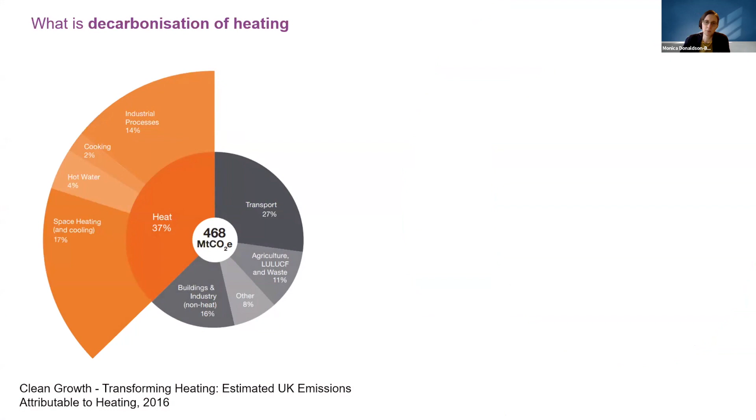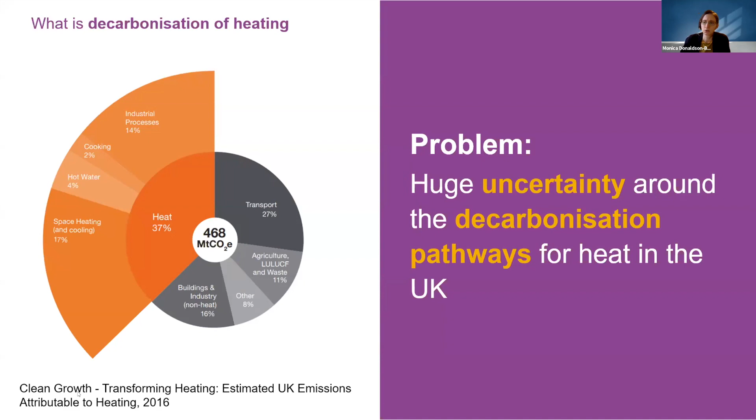But I think there's a second part of this issue as well, which is the fact that there is uncertainty. There isn't just one straightforward way that we can take in order to decarbonize heat, and that, as I said, produces uncertainty in the industry. So in order to move forward the debate, we developed a series of roadmaps for the delivery of infrastructure required for 3 different pathways for heat decarbonization.

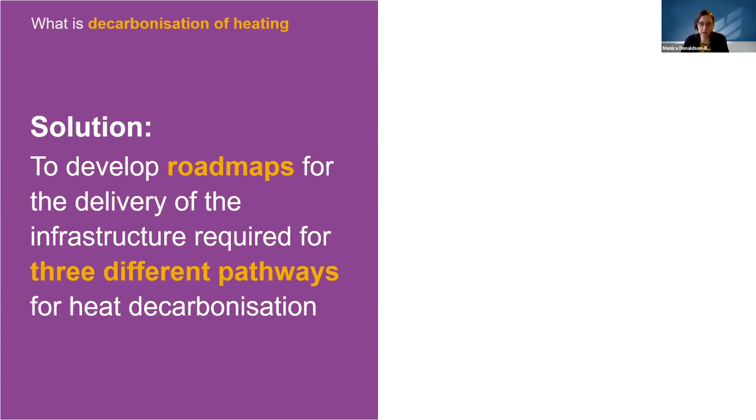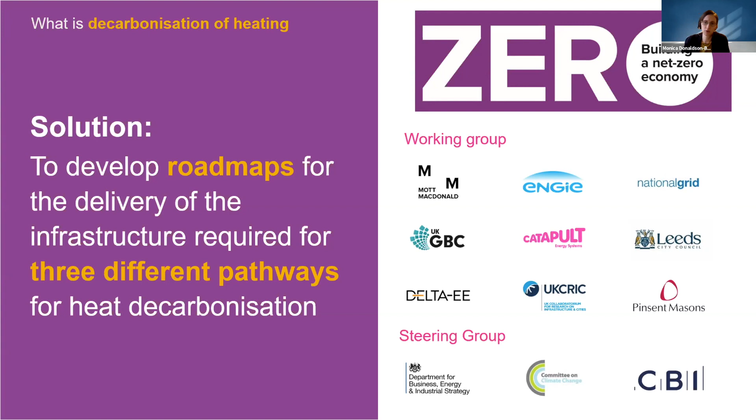This work was undertaken by the Net Zero Infrastructure Industry Coalition, which is a coalition that was set up by Mott MacDonald, and it brings together organizations with infrastructure experience. And the idea is that we can help advise government on how we can best achieve net zero for infrastructure. The roadmaps themselves were developed by a working group that has a very broad and wide range of experience in delivering infrastructure. And also we had on our steering group the CCC and CBI.

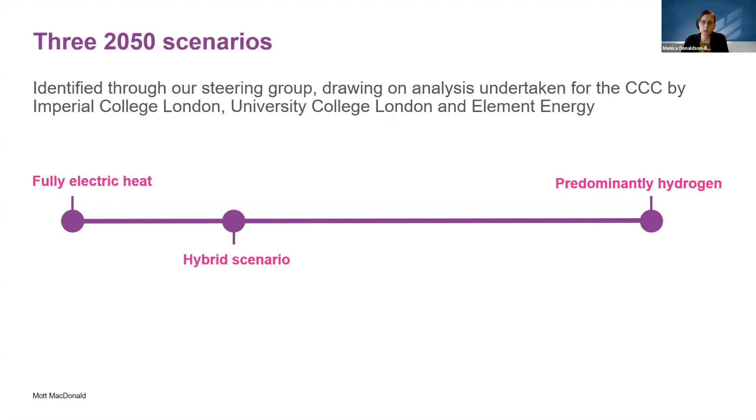So I mentioned before that there's uncertainty and that there are multiple ways in which we can decarbonize heat. And we selected 3 separate scenarios. We based these scenarios on research that was undertaken for the previous CCC Net Zero report. And we chose on purpose 2 of them at the very ends of the scale. So in one of them, we would have a full replacement with electric systems. On the very other end of the spectrum, we would change all natural gas with a green gas. In this particular case, we looked at hydrogen. And then we also looked at a hybrid scenario, with the hybrid scenario sitting closer to the fully electrified one.

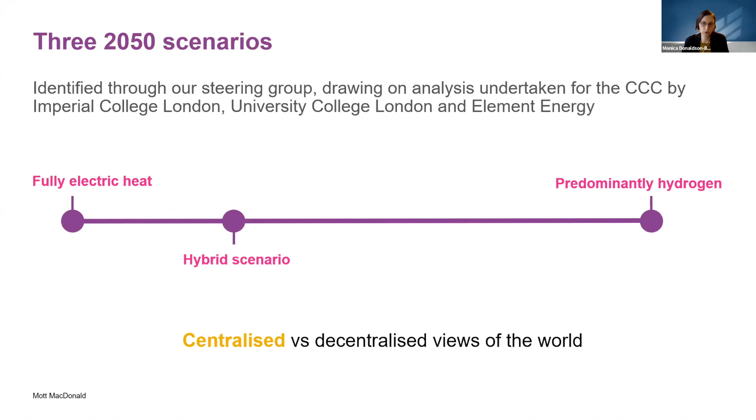We can achieve any of these scenarios in a centralized or a decentralized way, depending on how we propose to implement solutions. And for the purpose of this work, we looked at the centralized version because we are interested to understand the implications for the infrastructure.

So what did we do as part of this work? Well, we developed the infrastructure roadmaps, looking at the entire energy system, all the way from energy production to end users. And we mapped the actions and milestones from now to 2050 that need to be met in order to decarbonize heat for all 3 scenarios. We weren't trying to give a definite answer, but we just wanted to move the conversation forward. And you can see in our report some of the technical details behind the roadmaps and the roadmaps themselves.

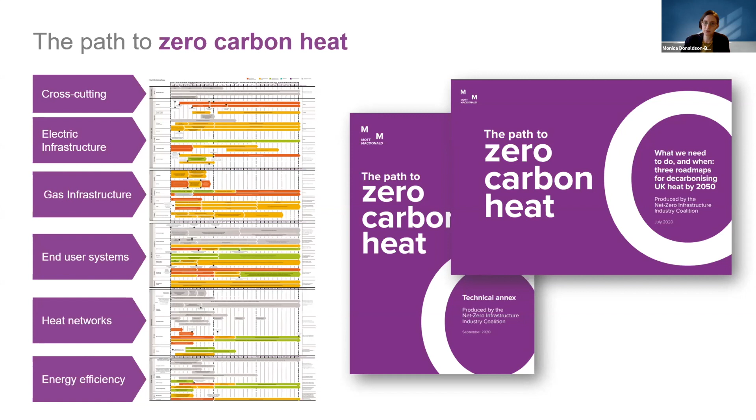So full electrification in 2050, we now have almost 23 million heat pumps in people's homes. And we also have over 20 million energy efficiency packages. Now, a lot of these interventions, not for all buildings, but for some of the buildings, are going to be quite complex.

Some of them can be intrusive, not all of them, but I'm thinking potentially some of the energy efficiency might change external appearance. So we need to make sure we tackle this early on, that we have the right supply chain in place and the right skill set in order to successfully deliver the installation. And that's just on the user side.

I think a couple of the speakers alluded to that peak demand. So what happens now if everyone's on heat pumps? The electric system basically needs to meet that winter peak load. In this specific scenario, we have about 400 gigawatts of total electricity generation capacity. That number can be brought down with more flexibility in the system and more targeted energy efficiency measures. But compared to what we have today, which is just about 100 gigawatts of generation capacity, it will be a significant increase.

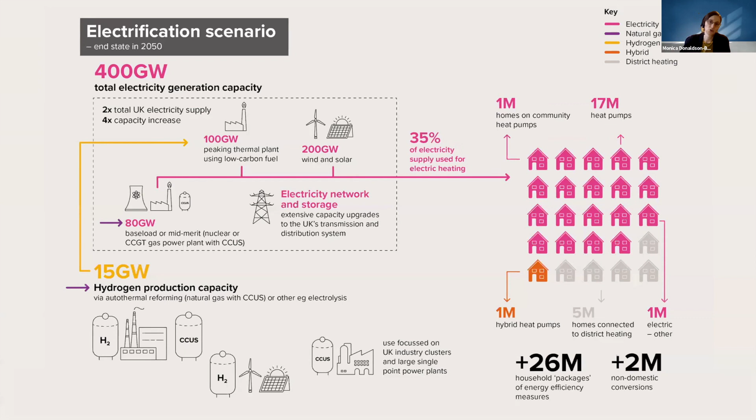Let's assume we have proven the feasibility. The next steps are the rollout and actually getting those 15 million boilers installed. That will require quite a high conversion rate, potentially about 1 million conversions a year. And similar to the heat pumps, you require planning and coordination and a high number of trained engineers and installers.

And again, similar to the electrification scenario, we have the system for the end user in the buildings, but then we need to get the hydrogen to the buildings. In this case, we're looking at the gas grids. We will need a hydrogen transmission grid, and we can probably repurpose parts of the existing gas grid, but we might also need to build new infrastructure. This depends on what type of architecture we choose for the whole system, and also on research that is ongoing. And depending on that, the size of the challenge will differ.

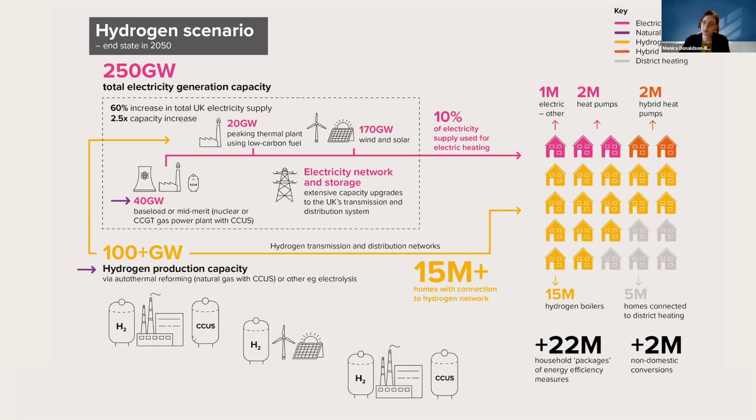Because the other thing, looking at the entire hydrogen pathway, is the fact that all of these various projects that I've mentioned are national scale infrastructure projects, and they need to be developed in such a way that they're coordinated and sequenced in the right way. We need to bring production online at the same time as we are converting the right segments of the grid and converting the end users. So again, similar to the electrification pathway, there is some underlying importance here that we look at the entire energy system.

So now that has the advantage that the boiler can pick up that winter load, and we see the impact on the generation capacity is lower than the electrification scenario, but we are also potentially introducing a more complex system in buildings. There's also the uncertainty around what type of gas we are going to use in those boilers. Is it going to be something like biomethane? Is it going to be hydrogen?

And we need to be able to answer that question as soon as possible, because one of the concerns and challenges with the hybrid scenario is, whilst it's good to have the options for end users to use different systems, it also brings uncertainty. It brings uncertainty for end users, but also for the supply chain, because they need a low risk environment in order to be able to invest in the new technology.

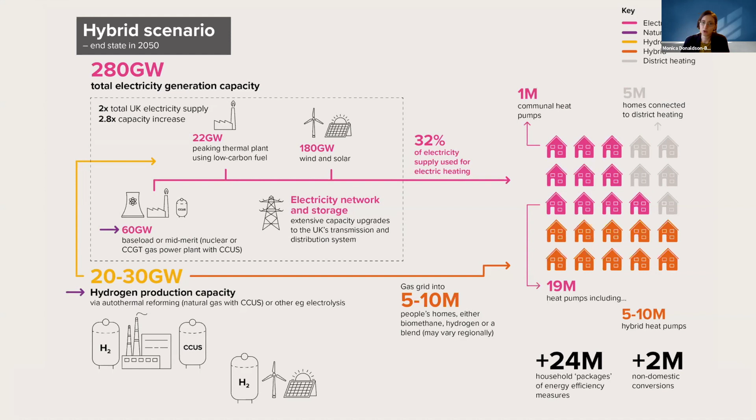So we have now looked at three examples of three different pathways to achieve zero carbon. And we've seen that there are both challenges and solutions across the entire energy system, and also the importance of understanding the entire challenge across the entire system. So having looked at these three pathways, we've pulled together some of the key recommendations that we think apply for all pathways.

We need to demonstrate critical new technology, and that will vary from carbon capture and storage to floating offshore wind. We need to develop the regulatory, market, and risk-sharing agreements to support this mass deployment of complex new technology. We need to make sure that we manage that peak load. We need to upgrade the capacity on our transmission networks, and we also need to focus on end users.

We need to have energy efficiency measures, and that applies to every single one of the pathways. We need to deploy as many zero carbon systems as possible now, today, and that is things like heat pumps. We also need to increase heat network uptake, particularly for strategic sites, and also build end user confidence. This last one is definitely very important, because without end users, we won't be able to reach net zero. And the last point, we need clarity for supply chains and investors, because without this clarity and certainty, we won't be able to build those supply chains.